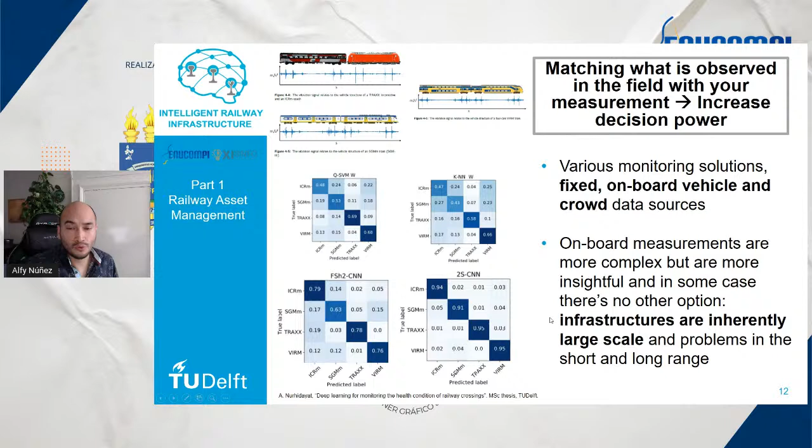So then this has a larger coverage. We can cover the whole infrastructure with this type of measurements, while the fixed locations are only at one place. But then, in the Netherlands, we have more than 7,000 kilometers of track. Then we need efficient methods, and that's why we work with the onboard measurements.

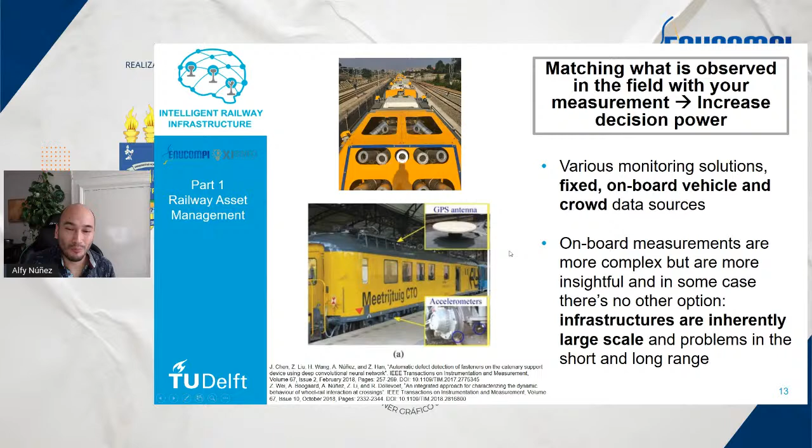Also, mobile phones provide a very strong tool actually to communicate directly with the passengers. So then if they're annoyed or if there are other situations, that could be fixed online. I think the tools are not yet fully explored so far, but we can certainly very much improve the travel conditions, let's say, the happiness of the people, by communicating directly with them whenever there are changes in the platforms or whenever there's some information they need.

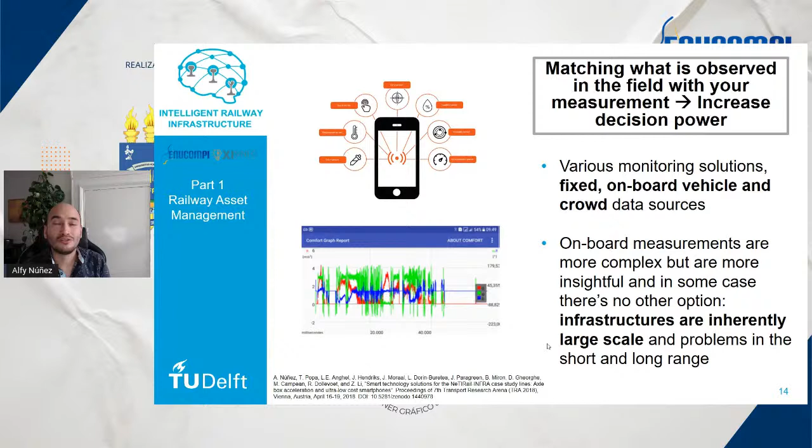So then you can see easily here that we have such a variety of information and sources, and they're all relevant. And the thing is, how can we make use of them? And this is where the intelligent methods play a very important role. Additionally, let me see.

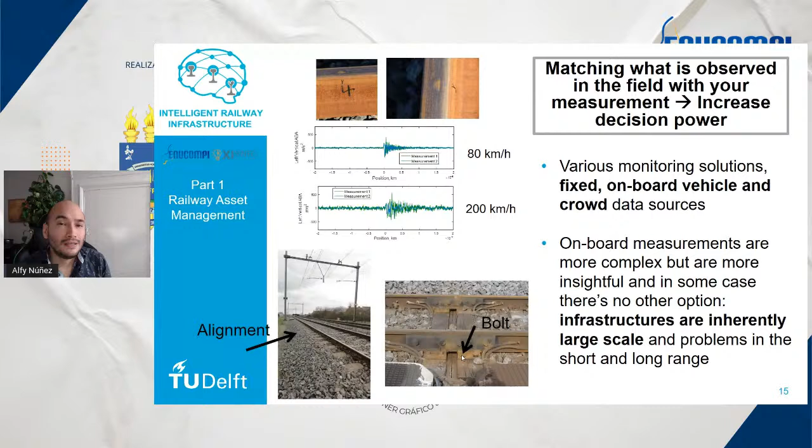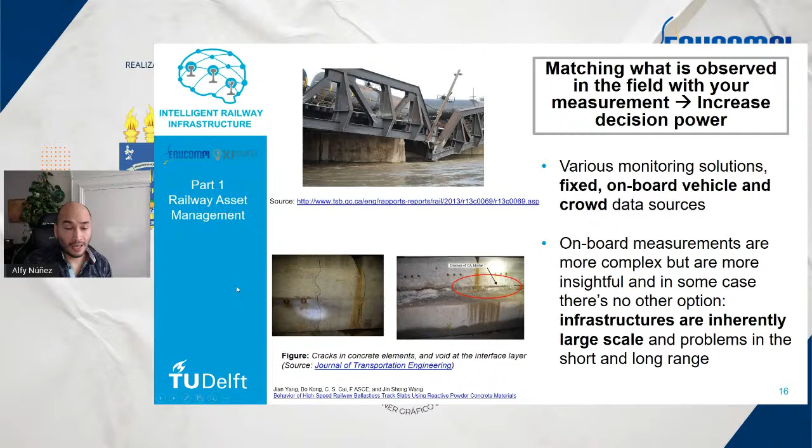Here there are also other examples. The monitoring here with the new solutions. The sensor technologies nowadays are very available. So there could be problems also with bridges. There are also problems here with the concrete elements. So we have different sources of situations that could happen.

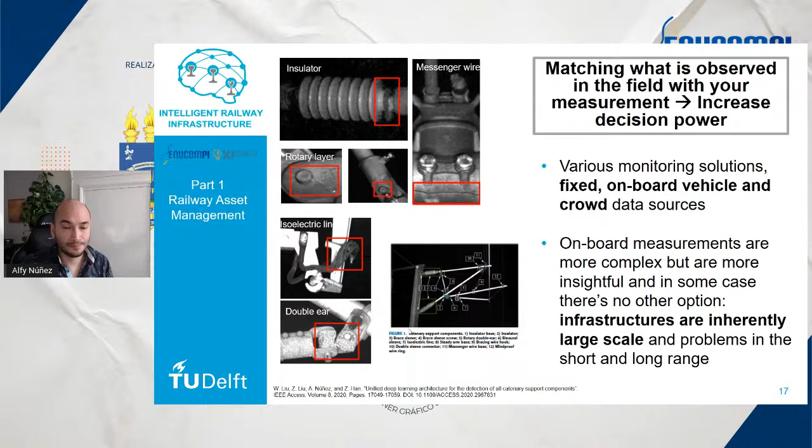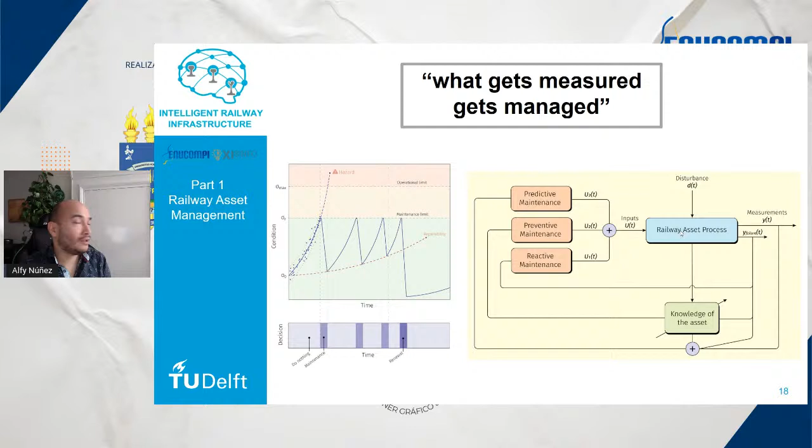But just knowing what's going on won't solve the problems. You really got to get your plans to actually prevent the problem from happening or to improve the condition of the infrastructure. Over here we see that in terms of decision making, there's reactive maintenance, for instance, where you wait till a problem happens and then you fix it. The problem here is the performance is rather low, because the infrastructure won't be available for a while. But then there are new techniques that allow you to predict when the problems are going to happen. So they require more knowledge, more technology, more intelligent systems. Yet the performance that you expect from them is much higher.

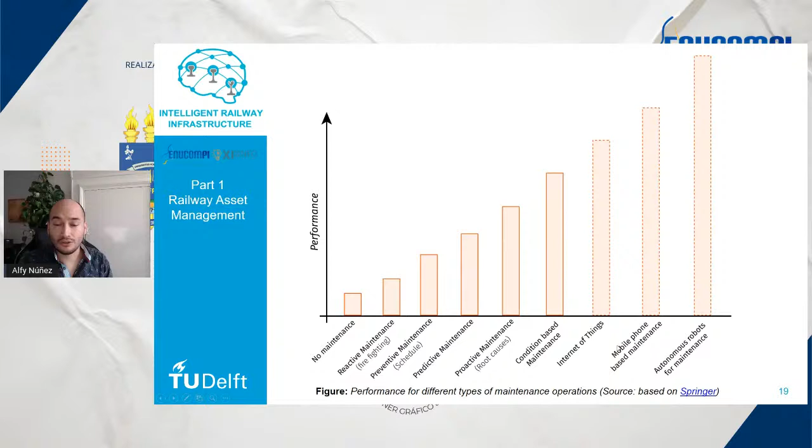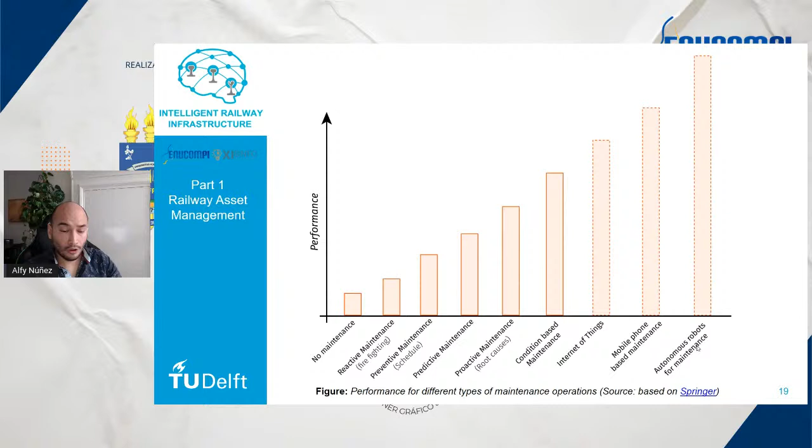So then we can increase the complexity of the decision making, and we get better and better performance every time. So when we incorporate all technologies, 5G, Internet of Things, then we can aim for a full communication of all that's happening. Even later in the future, we might have robots that do the maintenance by themselves. Then they will optimize and they will do all the activities at the best moment that they evaluate. So, that was the introduction to the challenges of railways.

Of course, we like that they communicate their anger, but then we want to avoid that to happen. And this is then one of the reasons why we also develop technology that can be mounted on board. Then we don't need to stop the railway operations to get the information we need.

It's such a beautiful country, and then the needs of our country are also what triggers the research that we're doing. I believe that if we were in another country where the railways are not, let's say, so intensely used, probably the needs might also be different.

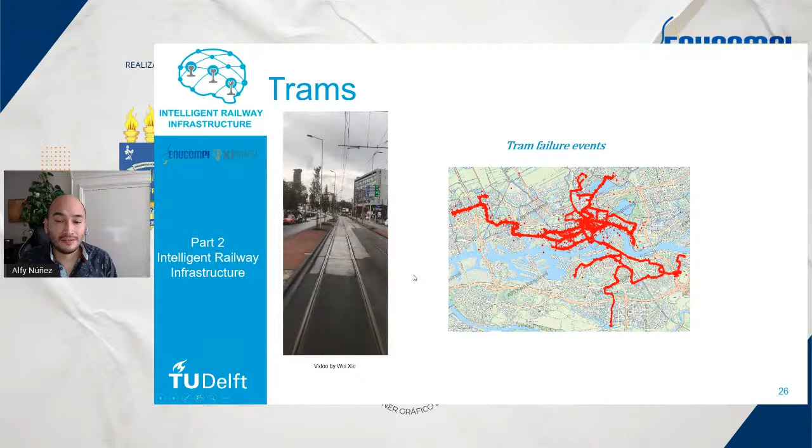Over here, you see an example of a project we did at Rotterdam City, and we get here information of tram failure events. So by accumulating the events, this resembles what we knew already, that during October, November, because of autumn, we get a lot of leaves from the trees falling, and the number of wheels sliding increases. Also, we get in January somehow also some events.

So this sort of mapping helps us to see clusters of locations where this sort of problem is more recurrent. Then because the same trams are going everywhere, we believe that those locations have more problems because of situations at the infrastructure itself. This sort of information then provides the infra manager decisions of locations that are more interesting to analyze.

Also, when measuring tram infrastructure, because we are in the city, we get also quite noisy levels of positioning. So then we have to deal with a lot of stochasticities, not just from the positioning, but also the measurement itself. And then there are techniques from intelligent systems that can help us cluster different locations, so that after we can analyze what's really happening there. So we combine intelligent systems with the actual railway engineering.

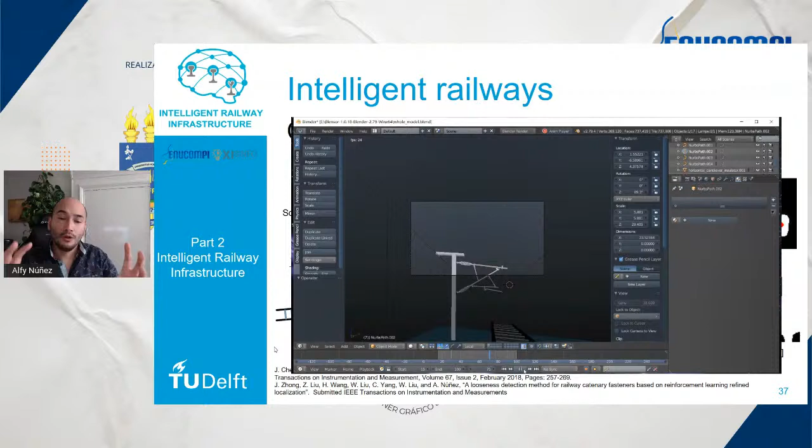So this is a technology where you combine the visualization aspects, but also once you manage to create those digital twins, you can feed them with information when there's not enough data about a failure. You can then digitally create those failure events, digitally train neural networks, and then afterwards apply them and test them in real life. So this digital infrastructure then is a very powerful tool, and it's going to be the research focus in the coming years, definitely.

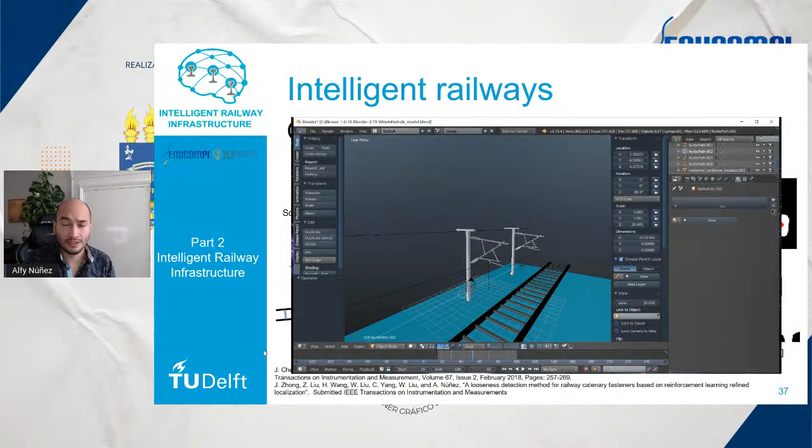So we also have new neural network structures, and they are every time more complex. They capture more features. So this is a very dynamic field of research. I recently saw last month like three new structures of neural networks for rail defects. So it's a field that is evolving very fast. In the coming year we are also aiming for what's called physics-informed neural networks, as a way to include, when there's not enough information, the knowledge about the physical system in the learning mechanism.

Also, fuzzy logic helps so much when we have to systematize decision support tools and to support the interpretability of the results, because once you get results, you have to make sure that the railway people can understand them. Then finally, those new neural networks are very complex, and training them is a non-convex problem. We tend to use backpropagation for the simplest structures, thanks to Paul Werbos for that. But for the latest structures, we really need to do much more to train them better. And I think evolutionary computation has a strong say about it.